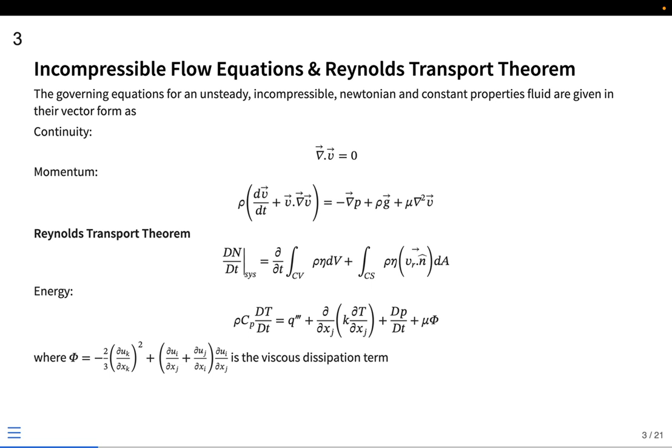So from the equations we started out with previously, we apply each of the simplifications using something called scaling analysis. The continuity equation remains the same. However, since this is a flat plate, the pressure gradient term goes off, and we also neglect other terms. Eventually we end up with this equation, where in the viscosity term along the x direction the velocity gradient is small, so that will be neglected, giving us this equation.

So here we have two equations, and we are essentially left with two unknowns, u and v, as functions of x and y. But of course these are partial differential equations which cannot be solved directly, so there are other techniques to solve these equations which we'll look at later.

Just as we have the velocity boundary layer, similarly, if the temperature of the fluid is not equal to the temperature of the surface, we'll have the thermal boundary layer. For that, we'll have temperature varying from T infinity to TW, the surface temperature. This is drawn assuming wall temperature is higher than the free stream temperature, so we'll have a very similar equation, but with nu replaced by alpha. The non-dimensional number that defines how these two profiles are related to each other is the Prandtl number.

So delta by delta t is going to be a function of the Prandtl number. After applying scaling analysis, we have different cases: where the thermal boundary layer thickness is less than delta, the Nusselt number will scale as Prandtl to the power 1 by 3. However, for delta t greater than delta, this will scale as Prandtl to the power 1 by half.

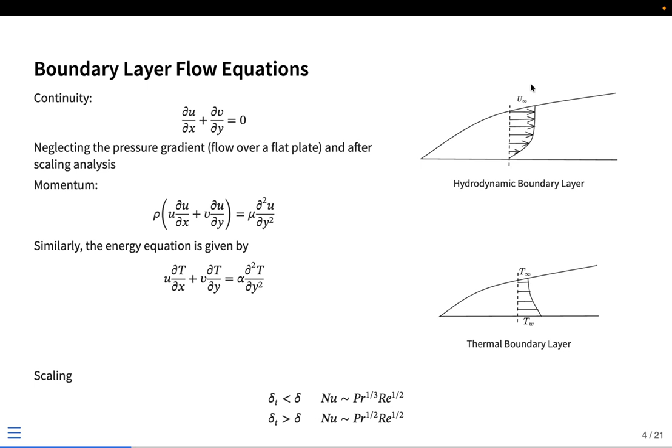Keeping all these conditions, we can determine the constants and come up with a polynomial equation for u, the similarity velocity, that is u by u infinity, the non-dimensional velocity. Once we have the velocity profile, the only unknown is delta. We substitute this equation back into the integral form and solve for delta. Once I have delta, I can use that equation and solve the energy equation to get delta T.

This is the integral form. These are the equations that need to be remembered, where tau w by rho u infinity square is basically my skin friction coefficient. Half of the skin friction coefficient is given by the derivative of the momentum thickness. Similarly, for the energy equation, we have the term as follows.

The main thing to note here is these solutions, like assuming a profile, are close to the exact solutions that we obtain. But as we discussed even before, these solutions are not accurate in any form. Even if you assume the profile and got a solution, if they do not match with experiments, you do not know how to improve them directly. So that is not a straightforward way.

But still, this gives you reasonably accurate solutions. You assume a profile that gives you the velocity profile, it gives you the Nusselt number, it can give you the skin friction coefficient, and all these values can easily be determined without having to go through the long transformations that we will be doing in the Blasius solution.

These are all external flows. Next comes the internal flows we discussed. Internal flow is where the fluid is surrounded by walls or something. Usually there are two different regimes.

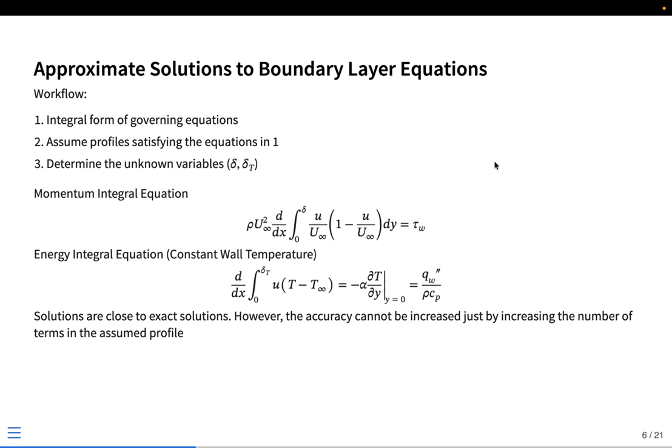But interestingly, even here, it is going to depend on the value of x for developing flow. Once the flow has fully developed, where both boundary layers have merged with each other, then the Nusselt number is going to be constant and will not vary in the axial direction. That is exactly the definition of fully developed flow.

But here again, the walls can have two different types of boundary conditions: either uniform wall temperature or uniform wall heat flux.

Here we have different cases for the developing flow: similar to before, we have parallel plate, circular pipe, and also the Couette flow case, where one of the plates, the top plate, is actually moving relative to the bottom plate. So instead of having zero velocity on both top and bottom, one of the plates is moving, giving a finite velocity on the top.

Then you have different Nusselt numbers on both the top and bottom plates, depending on the combination. You can have both walls isothermal, or one isothermal and the other adiabatic, giving two different values. When one of them is adiabatic, the question of Nusselt number does not exist because Q equals to 0.

Nusselt number will not be defined there; there is no point in defining Nusselt number over there. The only thing that is interesting there is finding the temperature.

These two equations are relevant when the velocities are actually high, and we came up with a new number called Eckert number, which gives us an estimate of how much kinetic energy is getting transported to heat energy. If the Eckert number is higher, especially true at higher Mach numbers, since this Eckert number is related to the Mach number of the flow. For low Mach number flows, this number is close to 0, so we can neglect it. Otherwise, for high velocity flows, it will be significant.

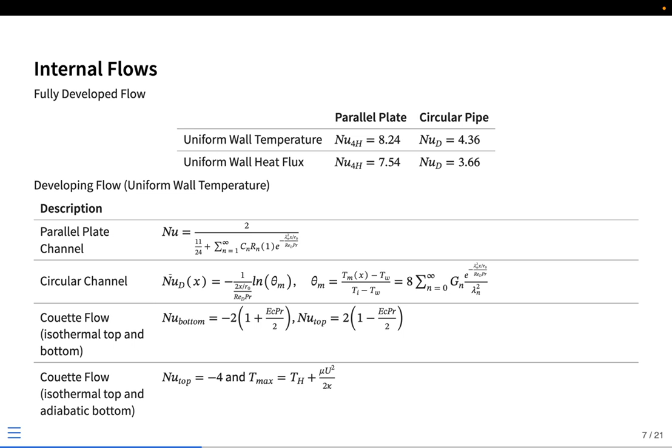Both external flow, like the previous boundary layer flow case, and internal flows have a common thing: an external driving agent. In the previous case, there is a free stream velocity u infinity maintained because of some externally applied pressure gradient. Similarly, in internal flows, even in Hagen-Poiseuille flow or parallel plate flow, there is an external pressure gradient being maintained. But for example, in Couette flow, there is a top plate moving with constant velocity, which is again an external means imposing forces at the boundaries. There is no body force term involved.

It is defined as the ratio of Grashof number to Reynolds number squared, where Grashof signifies the strength of buoyancy driven flow, and Reynolds number gives the strength of forced convection. So if Richardson number is close to 1, you can consider that mixed convection. If it is very much greater than 1, it is natural convection, and very much less than 1, it is forced convection. And we have different scaling laws.

These are important for natural convection design. All these are for natural convection. When Prandtl number is very much greater than 1, delta T will scale as Rayleigh number to the power minus 1 by 4. And if it is very much less than 1, it will scale as Prandtl number to the power minus 1 by 4 times Rayleigh number to the power minus 1 by 4.

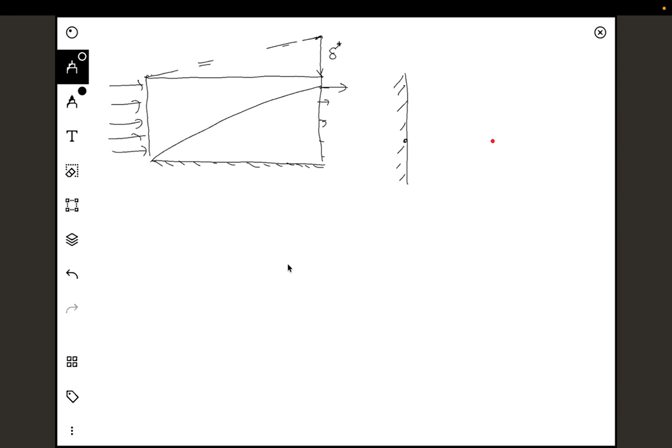Wall peak velocity, thickness of wall jet, and velocity scale are other important parameters. Wall velocity peak is like when you have natural convection, say over a vertical plate: close to the wall the velocity will be 0, and far downstream it will also be 0.

So it has to reach a maximum velocity and then go back to 0. This peak is given by this expression, and the thickness of the wall jet is given by another expression, with velocity scaling as Rayleigh number to the power half. Knowing this, Nusselt number scales as Rayleigh number to the power 1 by 4, and if Prandtl number is very much less than 1, then Prandtl number should also be taken into account.

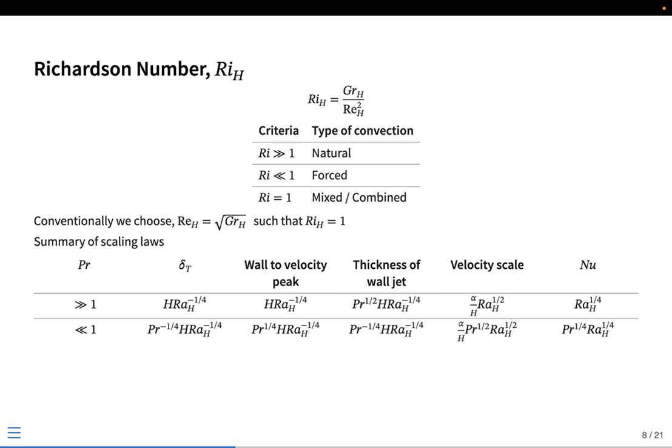These are different correlations. As we have been discussing, whenever you look at a correlation, the important thing is that the entire heat transfer is characterized by only one non-dimensional number in the case of vertical plates, which is the Rayleigh number. Depending on the range of Rayleigh numbers, there are different correlations, because each range corresponds to a different regime. For example, between 10 power 4 and 10 power 9, it will be in the laminar regime.

So you use the first correlation, and above 10 power 10, it will be in the fully turbulent regime, where you have a different correlation. For the entire range, the last correlation is suggested by Churchill's 1975 paper, where they fitted all the experimental data available to them, and this is the correlation that is used.

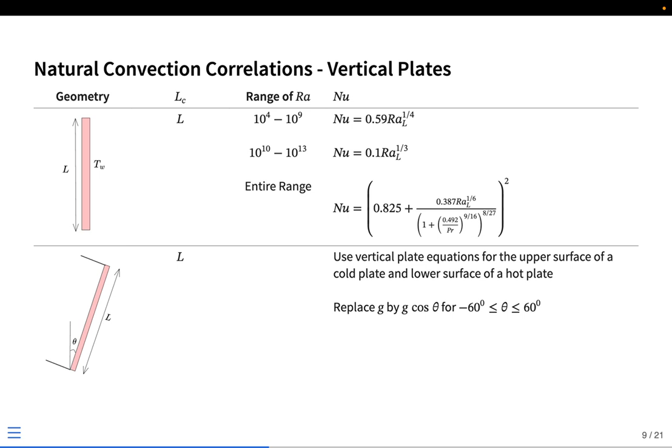For an inclined plane, you would actually use the same equation as for a vertical flat plate, just that the buoyancy force, the forcing term G, is replaced with G cos theta, where theta is the angle with the vertical.

The first one is external natural convection, and this other one is internal natural convection flow, where you have two different walls, both at different temperatures. If one of them is heating up, the air rises, and the other cools down, so there will be some circulation inside, but it won't be just one circulation. As the temperature difference increases, the number of internal circulations will also keep increasing.

From there they obtain the Nusselt number as a function of h times delta T. When you apply this, delta T is the temperature difference Th minus Tc, and based on that, these Nusselt numbers are defined, which again depend on the Grashof number in this relation for different regimes, as I said previously. The angle of inclination affects these different correlations.

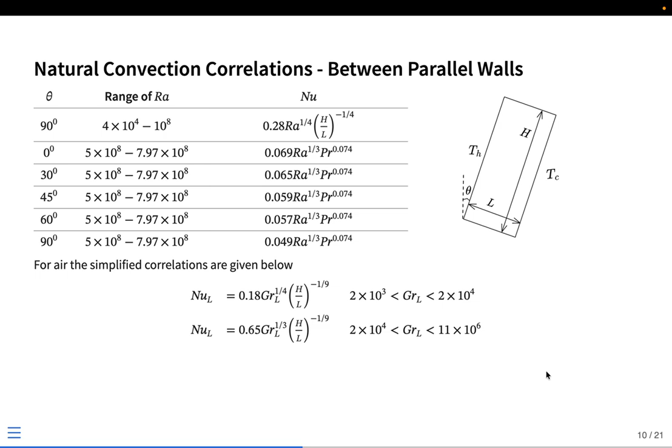Up until now, we have been discussing mostly the laminar cases. Now comes the turbulent cases, where the velocity will actually be a function of time, but knowing that function is not straightforward. The strategy used is to divide the velocity and all other quantities measured into two components: a mean component and a fluctuation component.

The fluctuating component is assumed to be random. So with that, we apply another technique called Reynolds averaging, or time averaging, where we fix a time scale and then integrate these quantities.

So when you measure the velocity, you'll get some profile experimentally, say something like this. What we are doing is fixing a time scale, and I'm just integrating over that time scale.

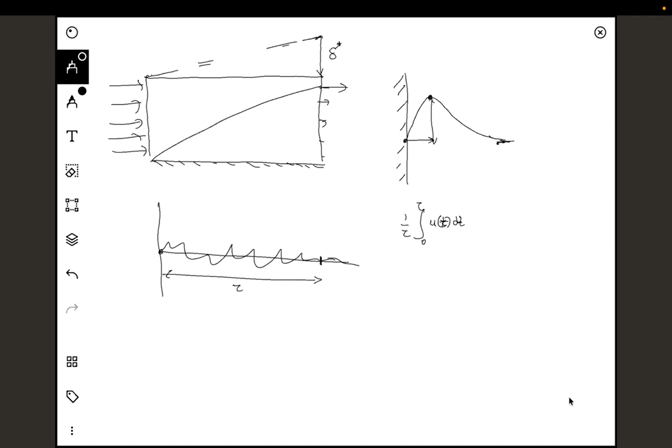This will give me the mean velocity, and once I have the mean velocity, the actual value minus the mean gives me the fluctuating component. Similarly, if we apply this averaging to all our governing equations, we end up with these equations.

The key idea here is, once we have these, we have additional terms coming into our Navier-Stokes equations, called the Reynolds stress terms. What these terms imply is that it's as if there is an additional viscosity present.

However, since u prime, v prime, w prime, t prime are all fluctuating or random components, we cannot directly get a value for them. So we need some closure to be able to solve these equations numerically, and that closure comes in different ways.

One way is Prandtl's mixing length theory, which we discussed previously, where you express these terms in a similar way as before, just replacing mu with a different term called eddy viscosity, which relates the fluctuating component with the gradient of the mean velocity component.

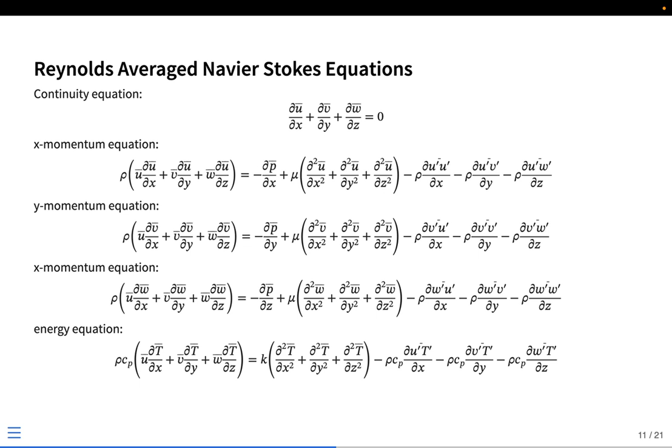Then we come up with ways to estimate that mu t as a function of other velocity properties, and there are several theories for that, which we are not going into in detail in this particular course.

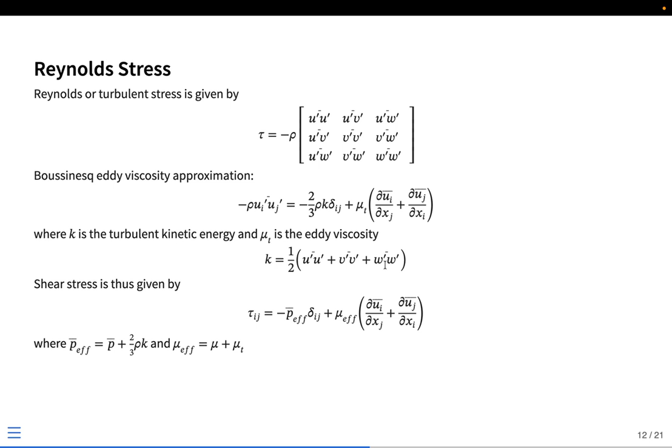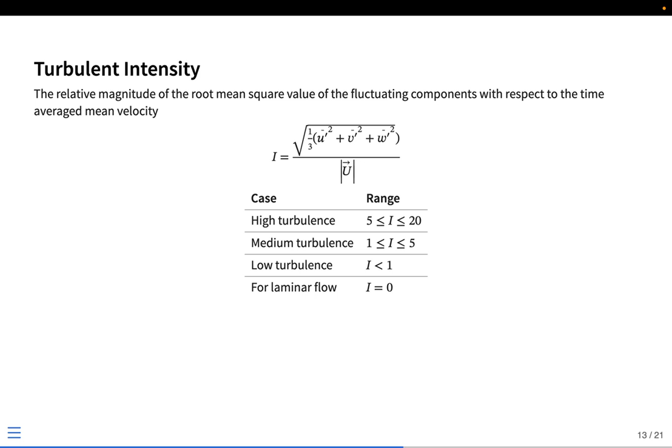The key thing is, once we have this, the main objective quantities we are interested in are something called the turbulent kinetic energy, defined as half of u prime squared plus v prime squared plus w prime squared. We also have turbulent intensity, defined as the RMS of these fluctuating components, and depending on its value, we can classify the flow as high, medium, low, or laminar turbulent flow.

Now we extend the theory to boundary layers.

Similar to the laminar boundary layer, we have turbulent boundary layer. The equations are very similar to it. The only difference here is the quantity mu is now replaced with mu plus mu t, so there is an eddy viscosity term that is coming into the picture.

The important thing to note here is this mu t, alpha t, whatever I'm writing here, are not functions of the fluid, not properties of the fluid, but they are dependent on the flow properties. So if Reynolds number is beyond a particular value, these values become significant. Otherwise, they tend to 0.

Interestingly, we have something called universal velocity and universal temperature profiles. Very close to the walls, the viscosity is actually way higher, and the flow properties are not dominant. It depends entirely on the fluid. We have the viscous subregion, then buffer region, followed by fully turbulent region. Whereas in the fully turbulent region, the effect of molecular viscosity is negligible and only mu t will be dominating.

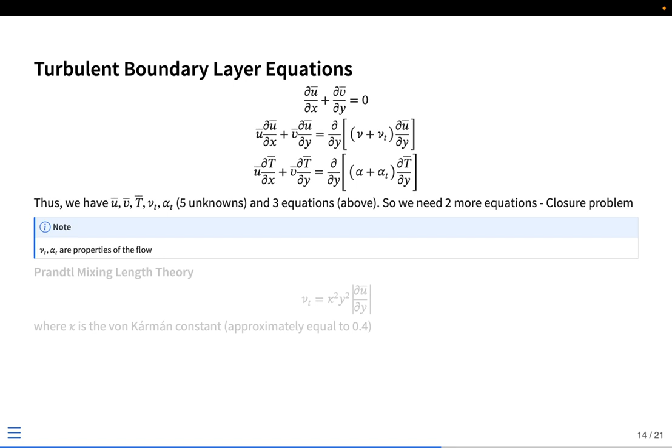This is a mixing length theory. As I said before, there are other theories to get these equations. This is a universal turbulent velocity profile.

The idea here is to come up with two new non-dimensional numbers. One is y plus, which is the local Reynolds number, and u plus, which is the u bar related with u tau, where u tau is given by square root of tau w by rho.

The advantage with this particular profile is that it says this profile is universal in nature. So if you are solving for a particular flow, you do not have to solve everything. There are certain regions which you can skip.

We have actually solved some problems during week 8 or 9, where we made use of this turbulent velocity profile to compute the velocity. For example, we can use the integral equation, momentum integral equation, for the velocity profile. The main challenge we would be getting is the profile that we eventually came up with.

It's a one by n power law, like 1 by 7 power law, where u by u infinity equals y by delta to the power 1 by 7, and that obviously at y equal to 0, the shear stress tau will actually tend to infinity with that particular equation. So we cannot close that equation directly.

So we need to use this universal turbulent velocity profile, wherein close to the wall we'll actually compute the CFx. We will have to know what the y plus value is, like whether we are in the fully turbulent region discussed here, and then we will use that corresponding equation. From this equation, for the entire flow, we can replace this with a power law equation.

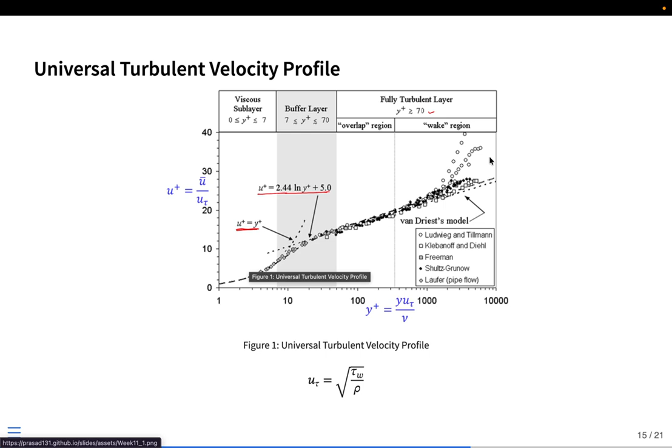U plus is y plus to the power 1 by 7 times some constant. From that equation, we will get the skin friction coefficient. Once we have the skin friction coefficient, we will substitute that back into our momentum integral equation, and from there we will be able to solve for boundary layer thickness and get everything else, like the heat transfer coefficient.

Similar to the universal velocity profile, we have universal turbulent temperature profile as well, and this is the analogy that I have been mentioning about. The idea here is you have to express u plus as a function of y plus. Once you have that, at y equals to delta, u bar will be equal to u infinity.

So you can use that to get CF and substitute that here, solve this equation for delta. Once I have delta, I can compute what is the value of CF, etc.

Instead of solving for the energy integral equation, we can actually use the Colburn analogy where Stanton number times Prandtl number to the power 2 by 3 equals CFx by 2. Whatever CF I'm getting here, I'll substitute that, get the Stanton number. Once I have the Stanton number, I know the relation between Stanton number and Nusselt number, so I just take it on the right hand side, and that will give me the correlation for Nusselt number.

We actually solved a problem for this. So if you want, you can go back to the lecture videos, or you can even see the live session, which is already uploaded on YouTube for week 9 or so. That will give you an idea of how to do this with an example problem.

In the last week of the lecture videos, we discussed boiling, starting with the differences between evaporation and boiling, and then identified the pool boiling curve, where if the temperature of the heater is constantly increased, the heat flux initially increases, reaches a maximum value, then decreases, reaches a minimum value, and then keeps increasing. Based on these gradients, we identify different regions, and each region has a different heat transfer correlation to calculate the heat flux, which is the main important point.

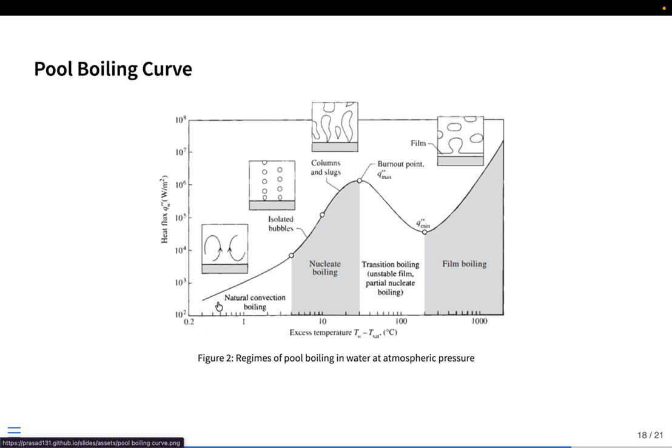If you're in the first region for natural convection boiling, you use the natural convection correlations we already used for differentially heated cavities, except the cavity is now vertical instead of horizontal. Next comes the nucleate boiling region, where the excess temperature, Tw minus T saturated, is within 5 to 30 Celsius, followed by transition and then film boiling. Each has different correlations. I've taken up problems in the nucleate boiling region, so you can go through the week 12 example problems to see examples of that.

Subsequent to boiling, we have the condensation problem, where we can have either dropwise or film condensation. This particular derivation is for vertical plate film condensation, where a liquid film falls due to gravity forces. The things we're interested in here are the film thickness, the velocity, the condensation rate, and the net heat transfer rate. These are the questions we're interested in, and we've solved problems on this for a vertical plate.

Similarly, we can also have a horizontal cylinder, which is the one we usually see. Similar correlations can be obtained for the condensation rate and average heat transfer coefficient, except the coefficients are a little changed. We solved a problem on this, comparing the rate of condensation for horizontal tubes versus vertical cylinder. We also determined for what radius or diameter of the horizontal tube the condensation rate would be the same, and how much percentage increase can be obtained by changing the cross section from round to flat. All these problems were solved yesterday.

And yeah, so these are all the things that we learned in this particular course.

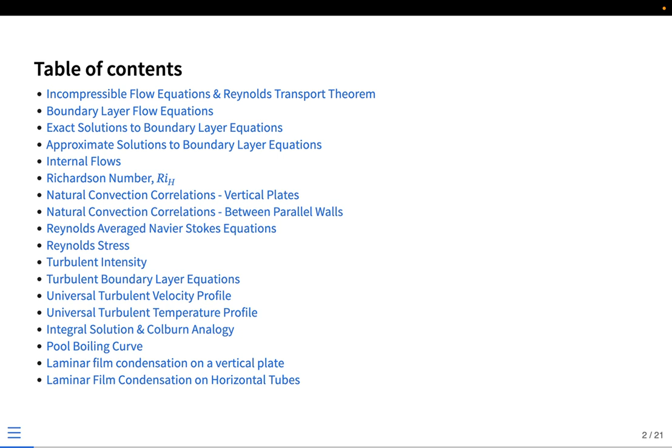Once we covered pool boiling, the next topic was condensation. There we limited our analysis to film condensation on vertical plates, horizontal tubes, and arrays of horizontal tubes—all of these were discussed. We also covered inclined plates, where you simply replace g with g cos theta or g sin theta, depending on whether theta is measured with respect to vertical or horizontal. That concludes our sessions.

So, are there any questions?

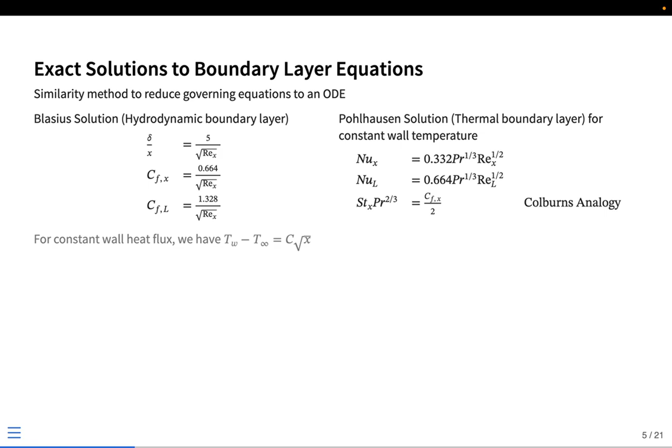So that's pretty much it—I don't have any further material for this session. This session is mainly aimed at giving you a connecting story for what you've learned throughout the lecture. As I said before, you'll either be asked to find the heat transfer rate or the temperature, and all you'll need for that is the heat transfer coefficient. This has been the main subject of interest throughout the entire course—whether it's a constant wall, uniform heat flux, uniform temperature, or variable temperature case, we are always interested in finding this H.

In conduction, it's straightforward: Q is given by K times delta T by L, and K is a material property, so there's no real problem. Even in radiation, it's a property of the surface times T to the power 4 minus T-naught to the power 4. Once we know the temperature and material properties, we can solve everything.

But in convection, it depends on material properties as well as flow properties, so we always had to solve for the flow—as we did for the parallel plate case. First we solved for velocity, then got the temperature. In forced convection cases, once velocity is solved, the momentum and energy equations are decoupled from each other—so we solve for velocity, use it in the energy equation, and get the temperature solution.

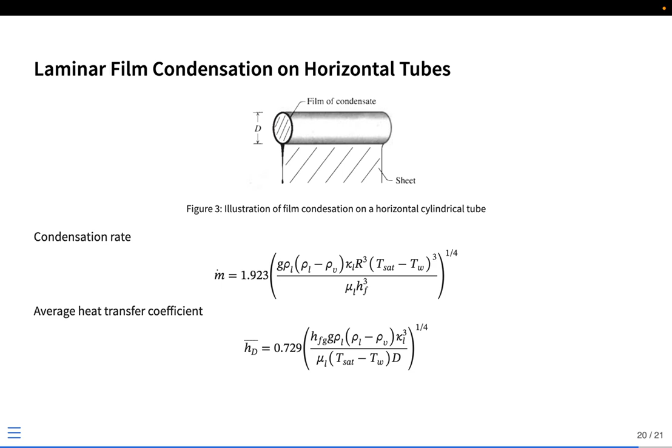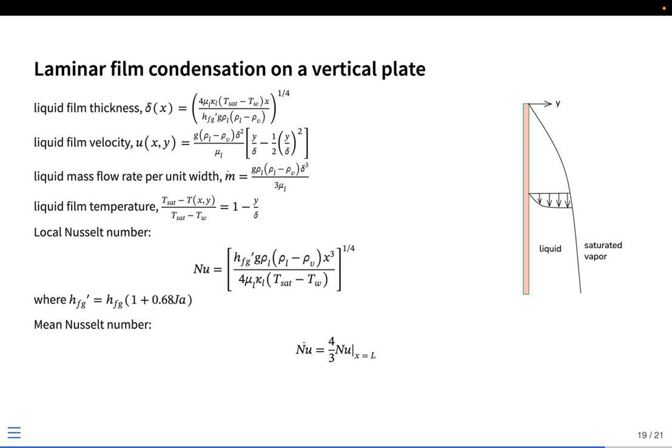This heat transfer coefficient, in any case, is given in terms of a non-dimensional number—the Nusselt number. So for your particular problem, you go to the literature, identify the Nusselt number and the relevant non-dimensional numbers, find the corresponding correlation, check its range of validity, and once you have the correlation, compute the heat transfer coefficient to get your heat transfer rate. That's the main point from a problem-solving perspective.

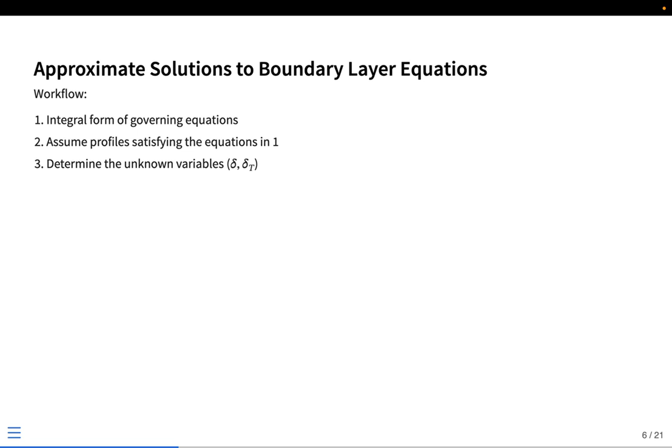I think we can end the session for today. There are no further questions.

I think there are no further questions.